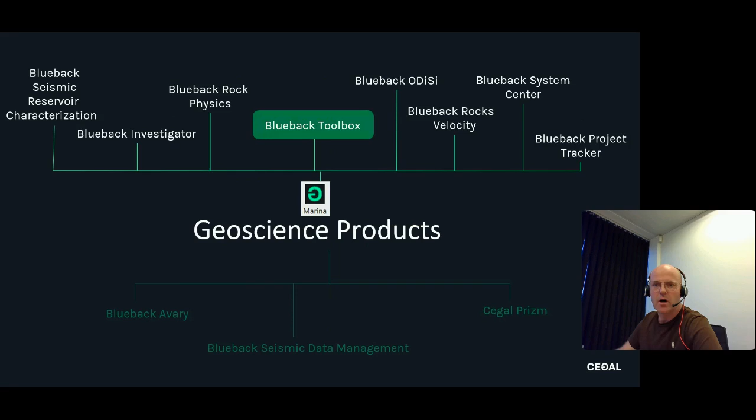Today, we are focusing on the Blueback Toolbox suite. The Blueback Toolbox suite is a comprehensive collection of tools designed to streamline and enhance your Petrel workflows, providing extended functionality and improved integration. This collection of small to medium-sized utility tools optimizes the user experience by minimizing mouse clicks, introducing features not available in native Petrel, and addressing common challenges geoscientists face in their daily Petrel workflows. Petrel is the best subsurface platform on the market today. The Blueback Toolbox suite expands Petrel and makes Petrel an even better software platform.

The Blueback Toolbox suite has been on the market for more than 10 years and is one of Cegal's most popular software products. The Toolbox suite has 5 individual toolboxes that are continuously being developed and expanded. In the latest release, we introduced 5 new tools and a range of enhancements to existing tools. All the tools have been requested by clients. Building functionality based on client needs is a common trademark of all our software products. The tools you get with the Toolbox suite are relatively simple in complexity, but they are highly appreciated by our clients.

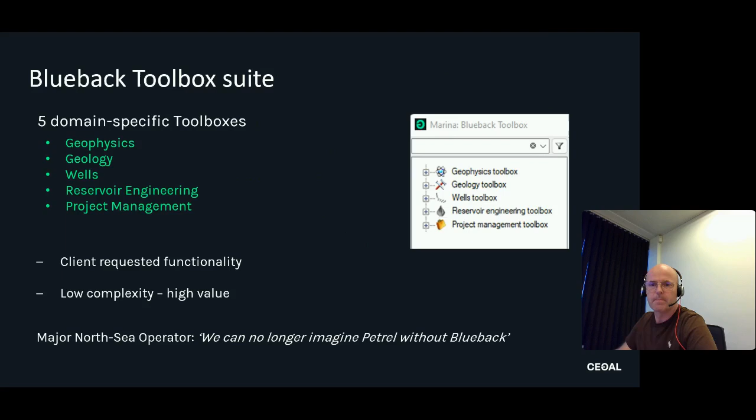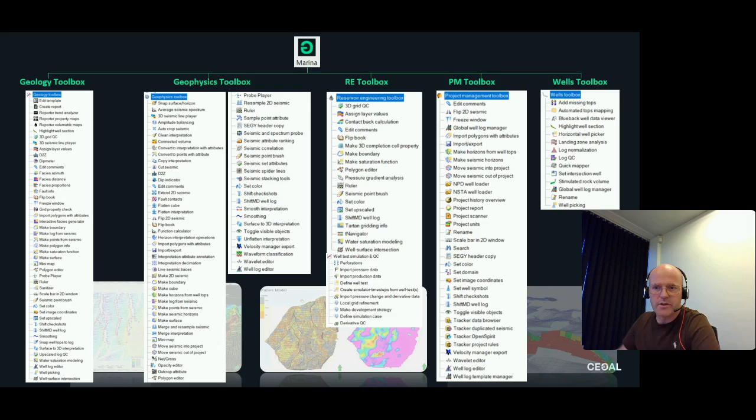Here you see a list of the 120 tools distributed in the 5 domain toolboxes: Geology, Geophysics, Reservoir Engineering, Project Management, and Wells Toolbox. Before we go to the live demo, let me summarize the 3 categories where Blueback Toolbox will streamline your Petrel experience. Blueback Toolbox introduces missing functionality that is not present in native Petrel. These tools let the user stay in Petrel for a variety of operations. Blueback Toolbox improves ergonomics on some standard operations that you otherwise avoid doing because they're very labor intensive. And Blueback Toolbox has tools that mitigate inconveniences that are a cause for general frustration.

In the demo, I will show examples from the 3 categories, and I will mix in tools from all 5 toolboxes. I picked out 13 examples out of the 120 tools that will give you a feel for how Toolbox is streamlining Petrel. So now let's jump to Petrel. I'll just turn off my camera here.

So before we start looking at the individual tools, let me just show you where we access the tools in the different plugins. So here you see the Marina dropdown that appears when you install plugins from Cegal. And we click here on the drop-down menu and we go and select Blueback Toolbox. And here in the Marina menu, you have access to all the 120.

But for the sake of the flow of this webinar, I've extracted the tools up to this personalized ribbons menu. Kudos to SLB for implementing that, so that we avoid clicking too much around in the menu. So I will show you, as I said, tools from the 3 different categories, and we'll start out with tools from the first category, introducing missing functionality. I have picked out 5 examples.

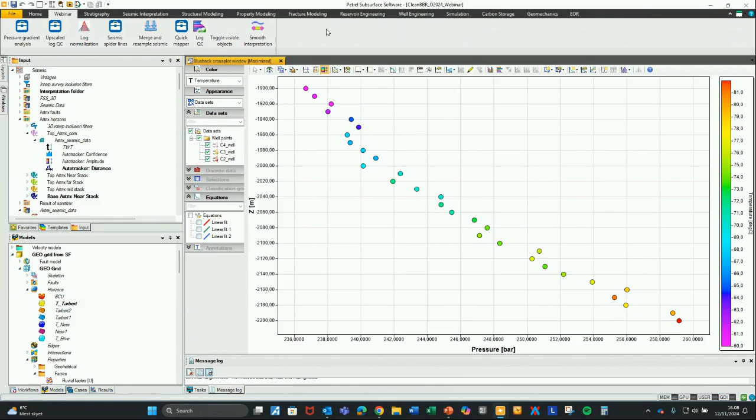So in this demo, I will introduce each tool by asking a question. So here comes the first question. Do you do pressure gradient analysis in Excel or other software and wish you could do it in Petrel? So with the pressure gradient analysis tool, now you can do that exercise inside Petrel. So here you see the menu. It's got lots of options. I'll just give you a quick overview.

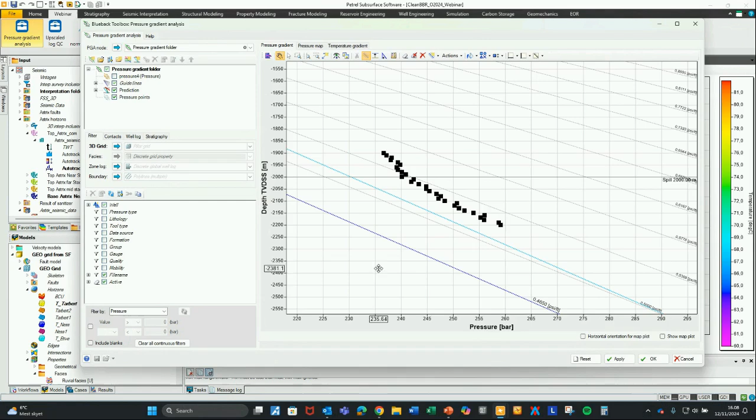So I've loaded my pressure points here already. We do that either by importing an ASCII file directly, or we can import those from point well data. So here you see the depth versus pressure plots with different gradient lines plotted on top. We can plot this in overpressure space, and here we can see that we probably have 3 gradients here. So this is just made up data, so of course we have 3 very well defined gradients here.

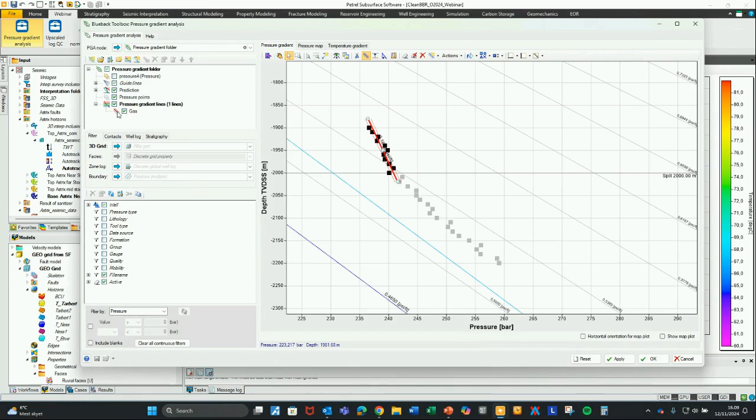So let's try and do the gradient regressions, and I'll do that by deactivating all the points and then setting the points for the individual gradient active. So now the first gradient here is active, and I can run that regression. That shows up here, and that shows up as a gas gradient. Those categories are defined by cutoffs on the gradients.

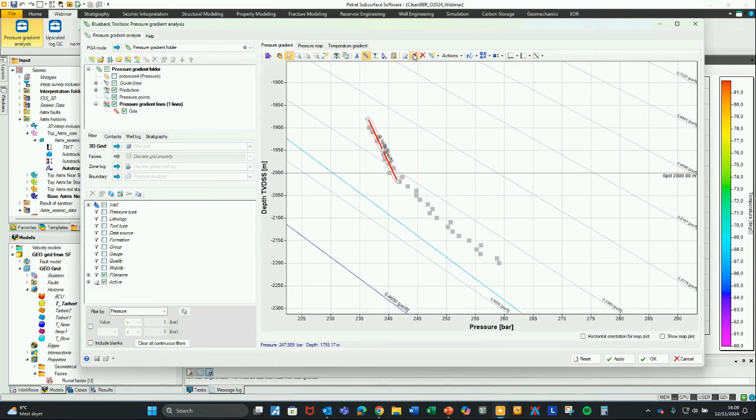Then I deactivate the points again and activate the points for the next gradient, run here, and you can manipulate these as you want. I just wanted to extend this line here a little bit like that. That shows up as an oil gradient, and then the last gradient here like that is a water gradient.

And now there's different exercises that we can do. We can, for example, run this scissor here that will then highlight the intersections between the gradients as the estimated contacts. So we have a depth estimate for the oil gas contact and for the oil water contact.

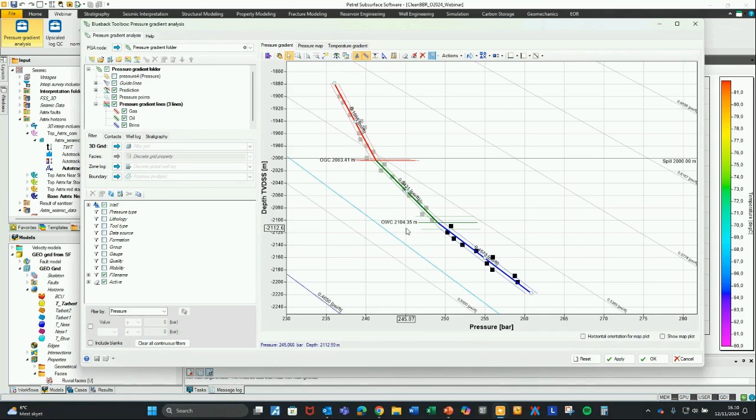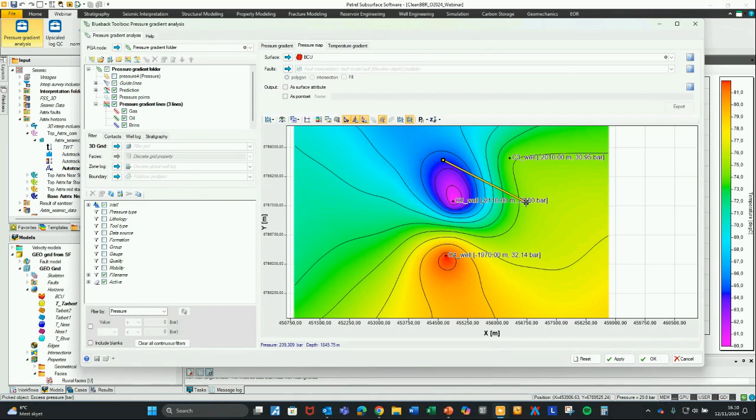We can also go to the next tab here, the pressure map, where we can insert a depth map. And here you see this is a structure map. When we press this button here, then that will be converted to an excess pressure map that will grid the immediate pressure points below this depth surface. And let's say that we had multiple gradients and multiple wells, we could then go in and do some fault segment analysis like this, and then do different fault segments, for example.

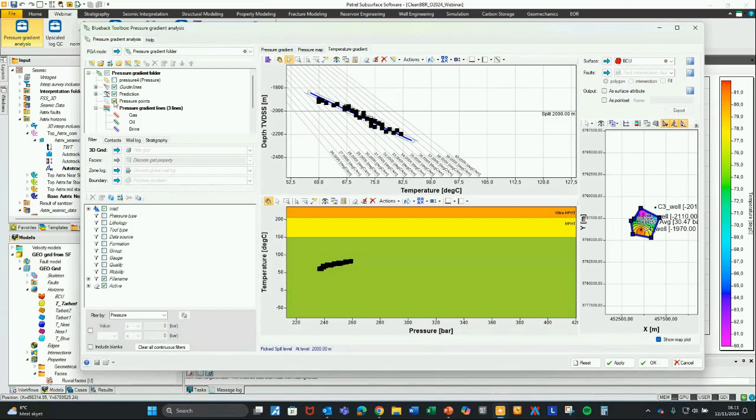Pressure and temperature are closely linked. So in this data set, we also have temperature information, so we can go in and run. So we'll just activate all the points and we can run a gradient as well. So here you see the gradient. There's lots of other details of this tool, but now I've given you a quick overview that tells you that you can do a detailed pressure gradient analysis inside of Petrel.

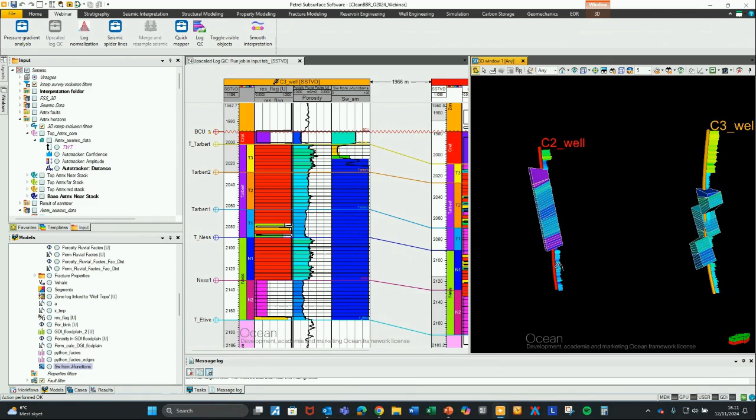Okay, so let me open the layout and ask the next question here. Have you ever been asked by a reservoir engineer to calculate vertical hydrocarbon columns in wells from the properties in a 3D simulation model? That's a very difficult task unless the cells in your 3D model are completely vertical and the well is just following that pillar of cells. So that is almost impossible.

But with the Upscaled log QC, we can go ahead and run that exercise. So as the name indicates, this is a tool that is built for upscaled log QC, and the tool does that by calculating vertical columns based on well log input and then based on grid input, and then it compares the two sets of columns. But it can also just be used to calculate vertical columns either from wells or from grid properties. So here we go in, select the wells that we want to do this calculation for.

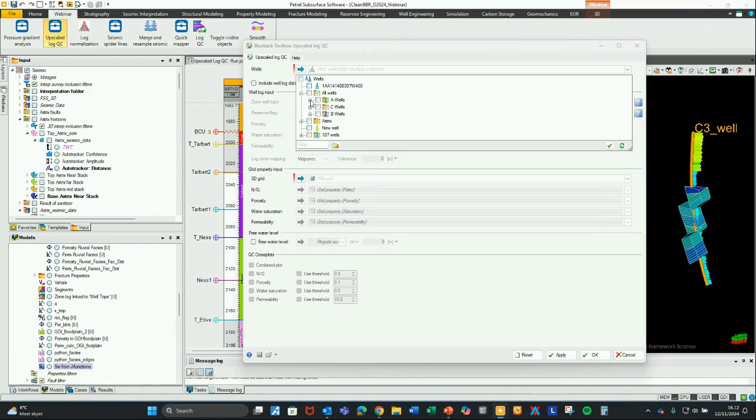So I'll just select these three first C wells, and then I need to specify the grid. This exercise will already pick out the relevant properties, so net to gross, porosity, saturation, and permeability. And then we can run this calculation.

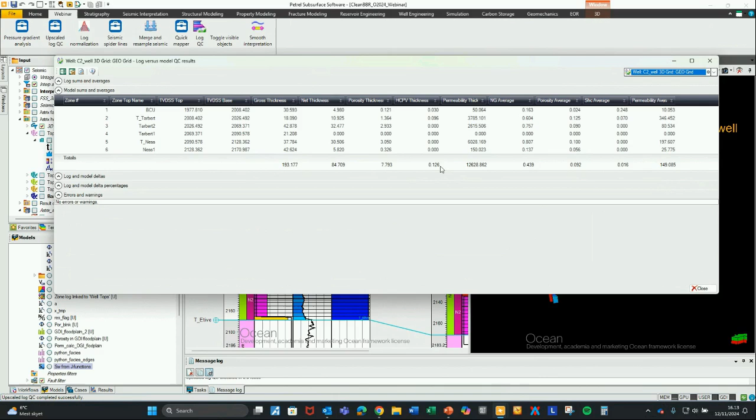So it's vertical columns, and it's done it per zone and in total. You can see here we have the different columns, and in this case we do not have a very thick hydrocarbon pore volume column. So that was the example that enables you to calculate vertical columns in Petrel based on wells and a 3D grid.

The next tool here, I'll just need to open a few objects from my well logs, the global well logs. I'll open up statistics for these two gamma ray logs.

So the question is, have you ever had the need for normalizing well logs per well in Petrel, for example between two different generations of gamma ray logs? That is a task that is very difficult because normalization of well logs has to be done per well. You can't just normalize an entire distribution, because then the normalization in the individual wells will be wrong. The log normalization tool in the toolbox allows you to do this per well.

So you can see in this example here, I've got two gamma ray logs, two generations. One here is present in 27 wells with a range from a minimum of 23 to a max of 164. The other generation is recorded in 80 wells with a minimum of 48 and a max of 188. So the same kind of delta, but different min and max.

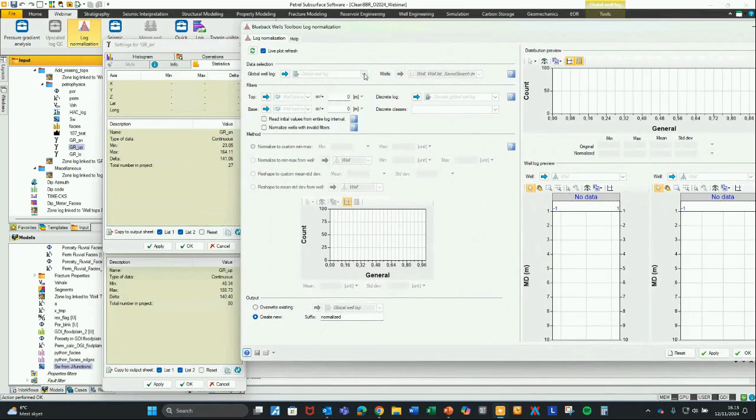And as a geologist, I know that these wells have been drilled in the exact same geology, so the range here should be more or less the same. For me to use this entire group of gamma ray logs, I need to go in and normalize one group to the other. So I'll go to log normalization, and I'll do the normalization of these 27 wells to the numbers in the other gamma ray log.

So I'll pick gamma ray AN. I'll select all the wells where this log is present. The tool is then extracting some statistics from the original distribution. Then we've got different options to do the normalization, and we'll just normalize to this custom minimum and max.

So here we'll go and select the minimum 48 and the max 188, and then we can observe the statistics of the normalized distribution. Down in this area here, we can go in and make snapshots in the individual wells to see the blue is the original and the orange here is the normalized log.

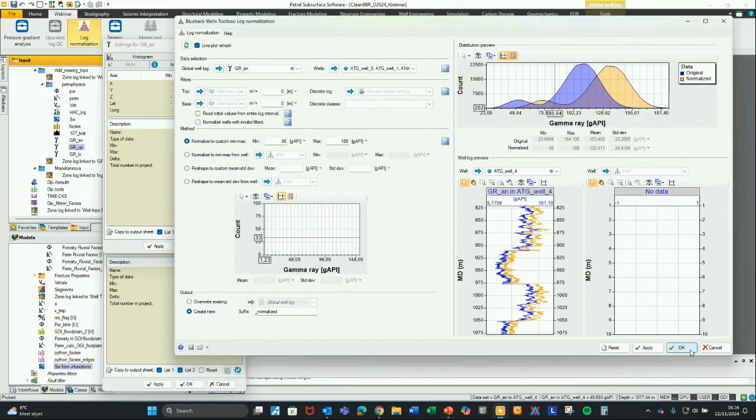We can then choose to overwrite the existing log, or create a new one, and in this example we'll just create a new one. Let me dig that up here at the bottom of my global well logs and have a look at the statistics. So that's the 27 wells, and we can now see that the minimum is 48 and the max is 188, and it's done that normalization in the individual wells, reading off the initial min and max for the normalization per well.

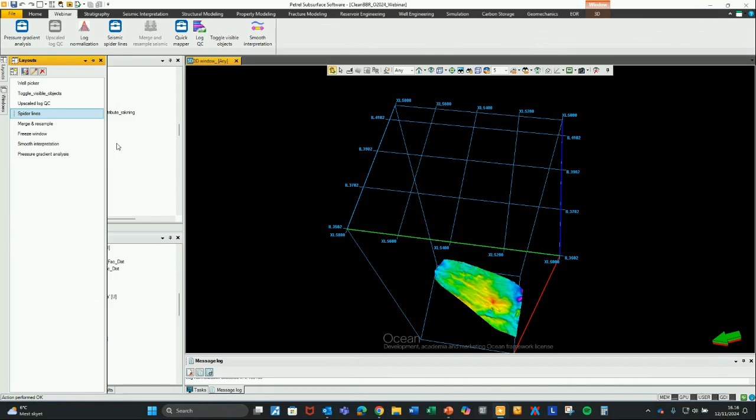All right, so getting ready for the next tool. Let me open up my layout here. And the question is, do you miss old Geoframe functionality in Petrel? For example, the spider lines tool.

We've gotten this question from many of our clients: could you please build in this tool, or this tool from Geoframe or other older packages? So we recently built in the spider line tool that allows us to build a spider web-like distribution of 2D lines from a 3D cube.

So let me open up the tool. Here I will select my 3D cube, the one that we're looking at here.

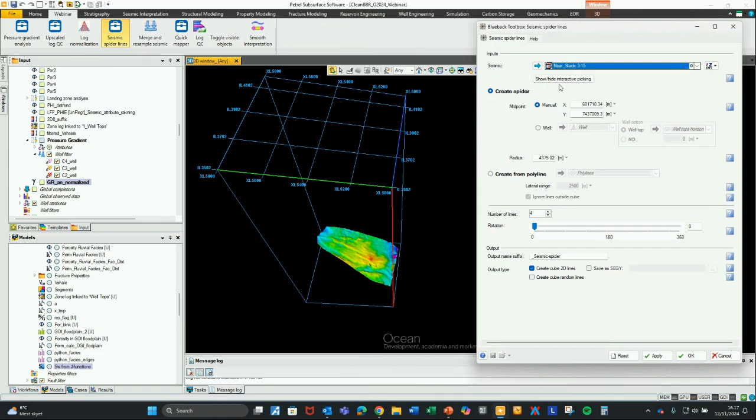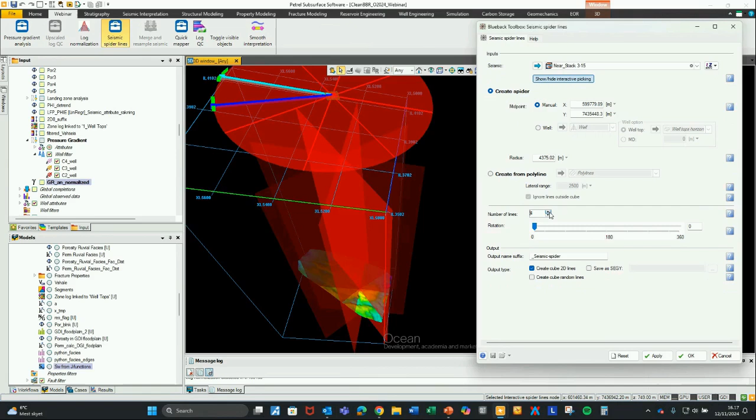And then I will generate, I'll go in and generate this widget. We want the center of this spider line to sit at the top of this structural surface down here. So I'll just activate this and drag it in here.

There we go. And then I will set the number of spider lines to 6. Here I can drag the radius of the length of these 2D lines, and I can also manipulate the angle, though it probably doesn't make a big difference. I can choose to generate these as 2D lines or as random lines in the 3D cube, so I'll just do the 2D seismic lines.

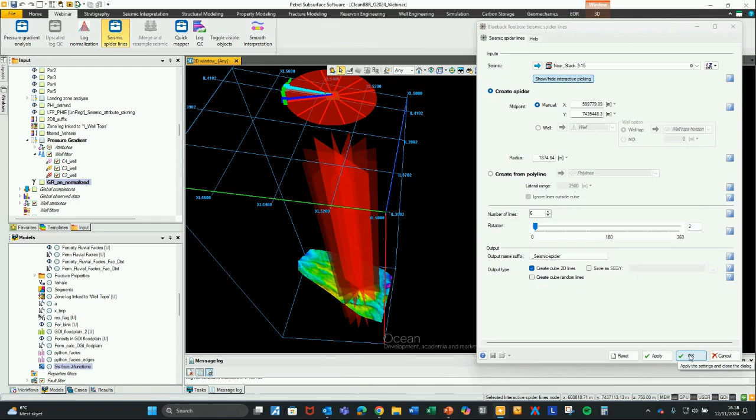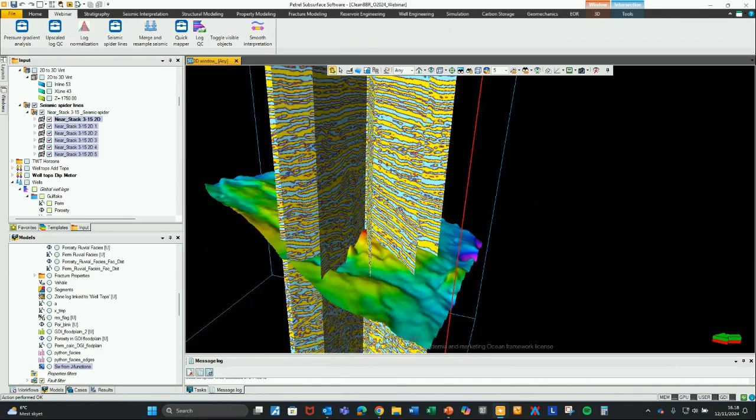I should have scrolled up to the bottom of my seismic folder, but now you can see I've just generated these 6 2D seismic lines that go through this top structure. I need to go rescan these amplitudes for the color scale to adjust, but here you can see that we've implemented it. That's a good example of us building in good functionality from some legacy products out there.

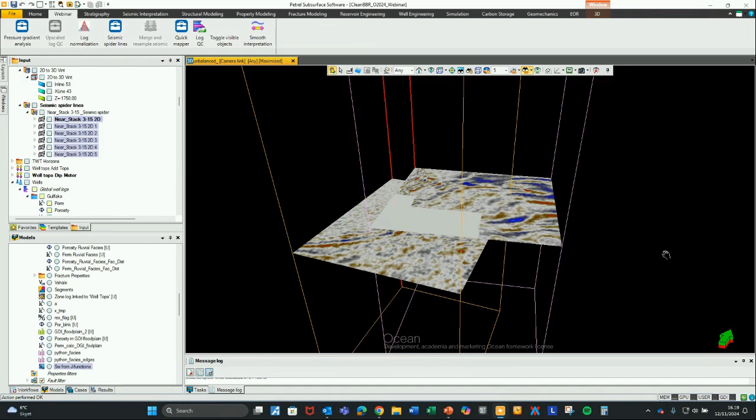The last example in this category, let me bring up my layout. So the question is, when you have adjacent or overlapping seismic cubes, do you go to other software platforms to merge these seismic cubes into one big merged cube? With the toolbox, you can do that exercise in Petrel. In this example, we have 2 overlapping seismic cubes, one here and one here, and the first one has an area of dead traces.

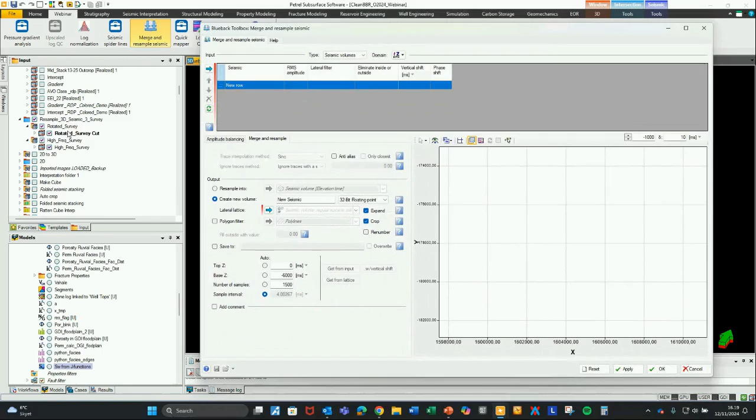Let's open up the merge and resample tool that allows us to do this exercise. It's already picked a tool, but I'll do it from scratch. Here we take those seismic cubes and drop them into the menu. You can already see the extent of the first cube, and then we drop in the next one, you see the extent of that. These colors indicate which of the cubes takes priority.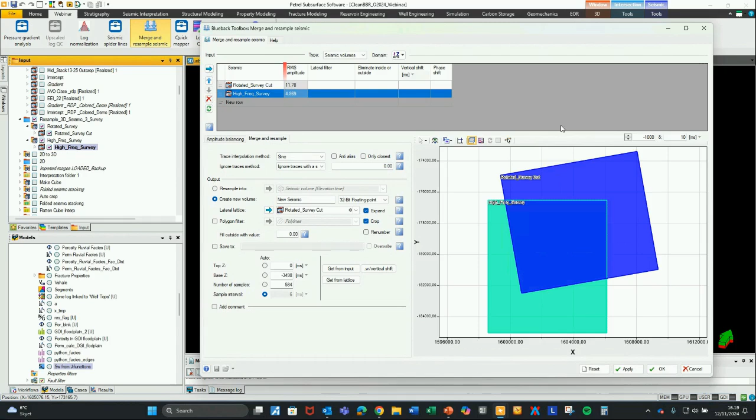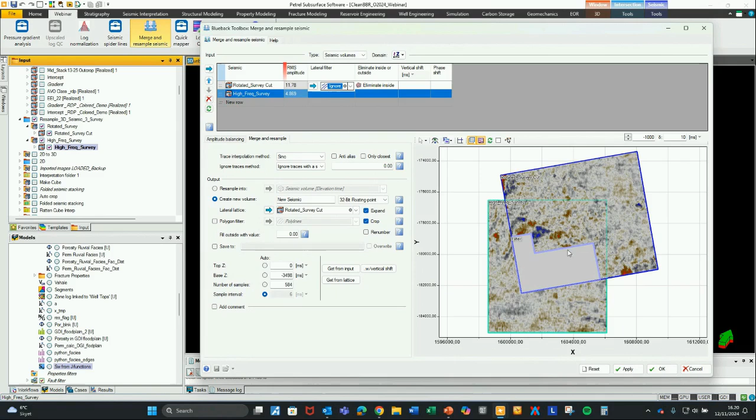So if you want to change that, you can push these cubes up and down in this menu. You can also display them as time slices. In this example, we want this blue cube to take precedence over the green one, but we have dead traces in the blue cube. So we can specify a polygon for that particular cube with the dead traces. I've digitized this polygon already, and we can tell the tool not to use the traces for the first input, but go to the second input and use those traces.

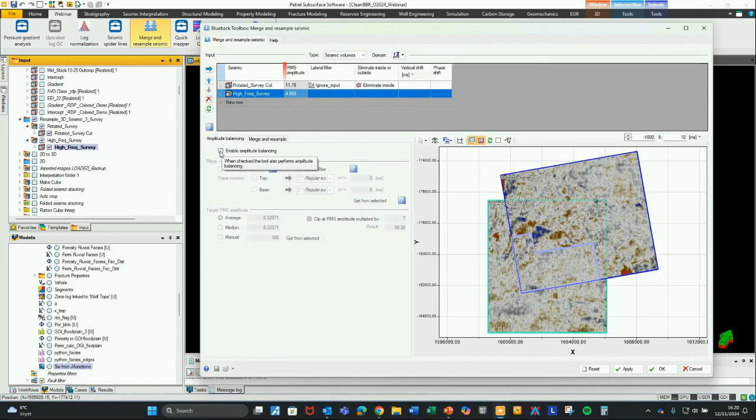Then it's always a good idea to do amplitude balancing in order to avoid areas of very bright seismic and areas of very dim seismic. You can see the tool has already calculated the root mean square amplitude for each of the cubes. When we enable this amplitude balancing, the tool calculates an average between the two, the root mean square average. You can also do median or just an arbitrary number.

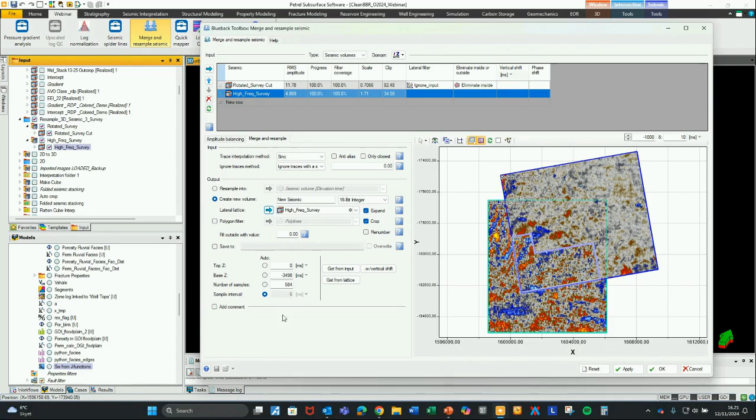And then the tool calculates scalars that are applied to the individual cubes to bring them to this new common average. Then we go back, specify the output format, and then we need to specify the inline crossline geometry of the output cube. Here we would like to use the inline crossline of that secondary cube, the green cube, which is this one. So I'll drop that in. Remember to keep the expand so that it expands to include everything here. We specify the depth interval and the sample interval, then click OK, and the tool runs this merge operation.

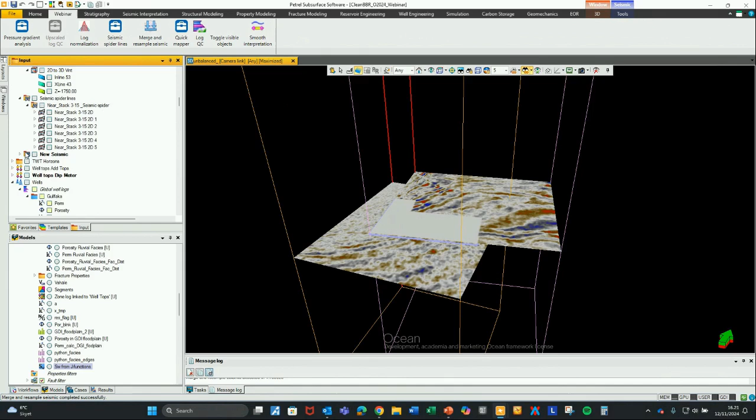Of course, this is demo data. If you have big mega cubes, it will take a little while—sometimes a day if you have really big cubes, but it will chew through the numbers. So let's see, it was here, new seismic. So now we have generated this new merged cube, merged from these two input cubes. That was the last tool in the first category.

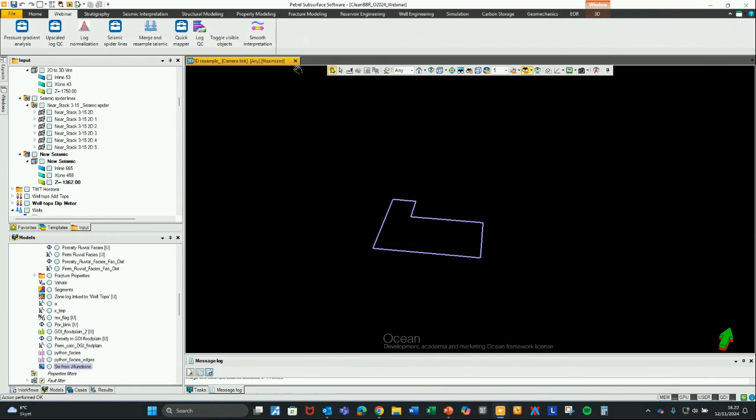Moving over to the next example. Now I will show you tools from the second category, tools that will improve your ergonomics, meaning less mouse clicks and less keyboard interaction to run certain operations.

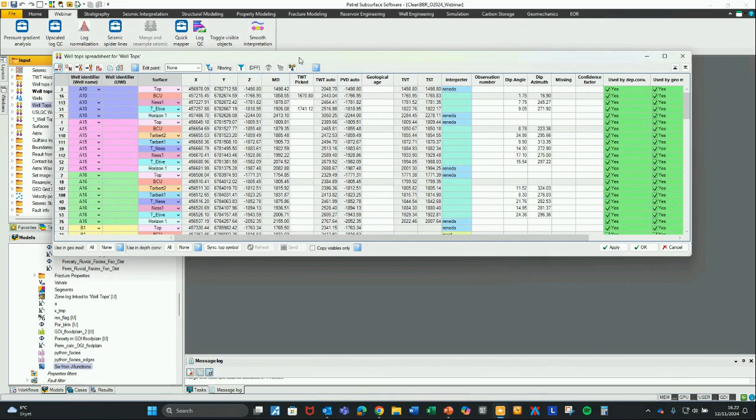The first example here is, let me bring up the information that enables me to ask the question: do you find it tedious to sample log attributes per zone, per well in standard Petrel? That was the wrong spreadsheet, let me bring up the zone spread here. So what I'm talking about is generating attributes like mean porosity per zone per well, the minimum porosity value, the maximum porosity values, and facies fractions. This is an extremely tedious exercise in Petrel, and with the tool called Quick Mapper, that exercise becomes relatively easy, reducing your mouse clicking quite significantly.

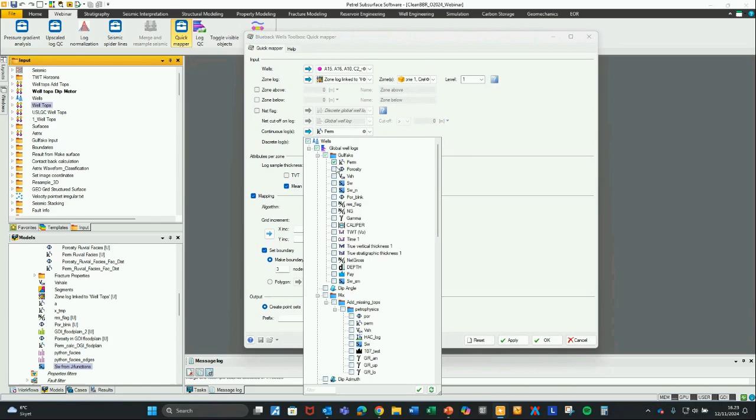Here we can go in and select multiple continuous logs: permeability, porosity, V-shale, and saturation, for example. We can also at the same time calculate facies fractions per facies log. We'll just add 2 facies logs here.

Then we select the attribute. We'd like to know the thickness, the mean value of those continuous logs, minimum, maximum, peak, rolling average, and curve summation. And then immediately we can go ahead and populate those attributes out into 2D grids.

Here I'll just specify the gridding settings, and I will click OK. And then down here, you can now see that the tool is calculating these attributes per zone and gridding out those attributes.

So the result sits down here at the bottom of the input, and you can see that we have two data objects per zone. For example, the point sets, this is the individual numbers. You can see at this point set for one of the zones, we have all the different attributes that we just calculated with very few mouse clicks.

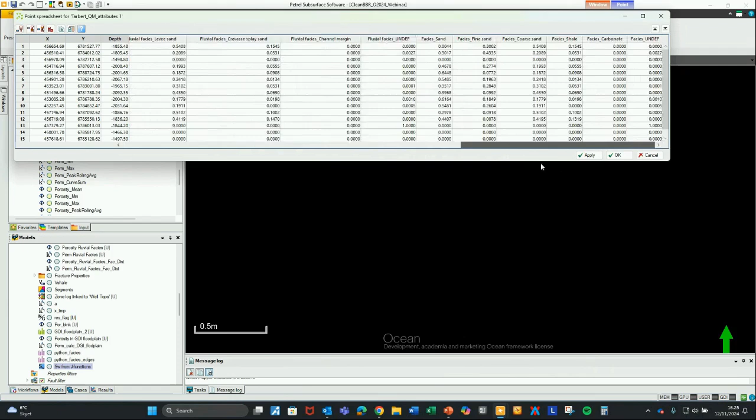Just to show you how many numbers we're talking about per zone, I can show you this spreadsheet here. We got the permeability attributes, porosity, V-shale, water saturation, and then the different facies fraction per facies type in those well logs. And immediately we populated those attributes out into 2D grids.

So here we look at the different permeability statistics, porosity statistics. This is a brilliant tool to go in and identify trends, lateral trends in your data, and you also have the different facies fractions here.

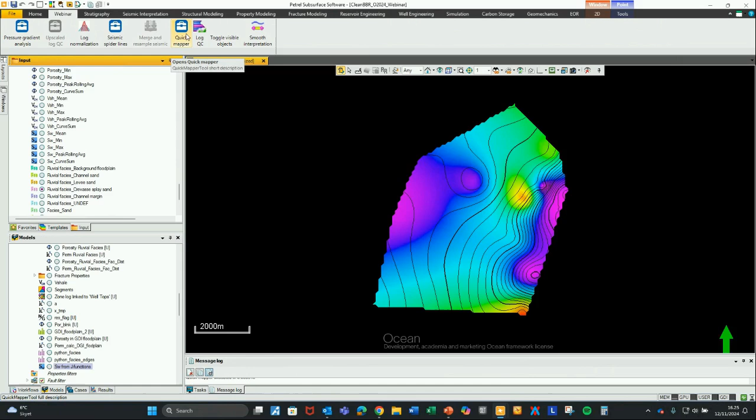So that was the first tool for improving ergonomics. The next one is a relatively simple tool.

So the question is, as a geologist, geophysicist, or reservoir engineer, we insert pseudo wells all the time. Do you find that exercise of generating pseudo wells a little tedious? Then we have a good solution for you.

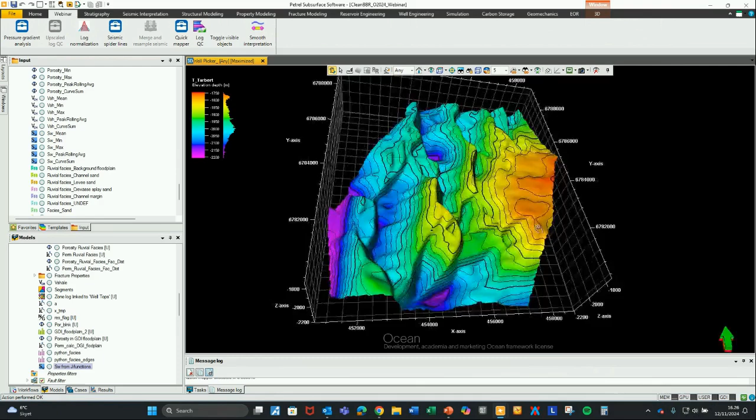So here I can zoom in on this structure here. I'd like to insert some pseudo wells. I can go here to the tool called well picker, vertical well picker, and I can insert wells with one click. You can see here I'm just very easily inserting some vertical wells along this top structure.

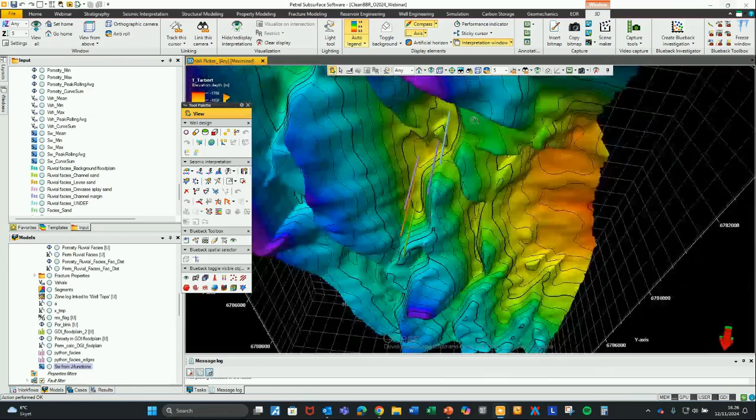You can see it extends a certain length above and below the surface that I click on. Of course, those lengths can be adjusted in the settings of this tool.

We also have a horizontal well picker. Let me just, that sits right here. That horizontal well picker requires that we go in and specify some geometry: the length of the horizontal part of the well, the azimuth of the horizontal part of the well, and then a vertical offset we can apply to the clicking.

So if I go in here and click here, now I am very easily inserting vertical or horizontal wells. And this is completely horizontal wells. You can kind of bend the horizontal part up or downwards by playing a little bit with the toe inclination.

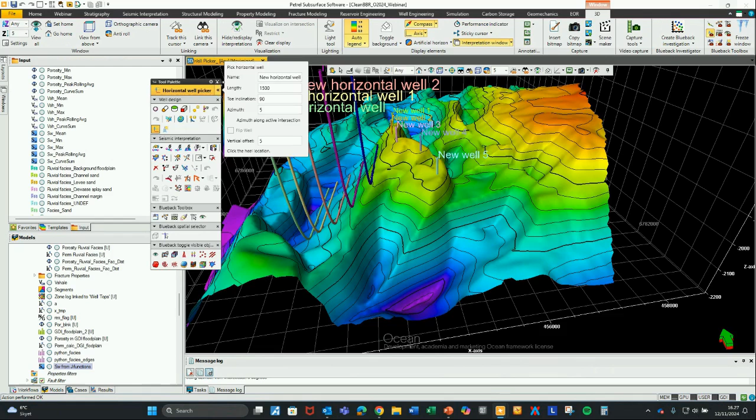The vertical well picker is workflow enabled. So let's say that I want to go in and build a regular spaced grid of vertical wells. I can then go to the workflow here.

Let me just show you, the workflow step looks like this. So here we have the well picking. And if I run that workflow here, you will see that now this workflow is inserting this regular spaced grid of vertical wells.

We are currently working on workflow enabling the horizontal wells. You'll probably see that being introduced sometime next year.

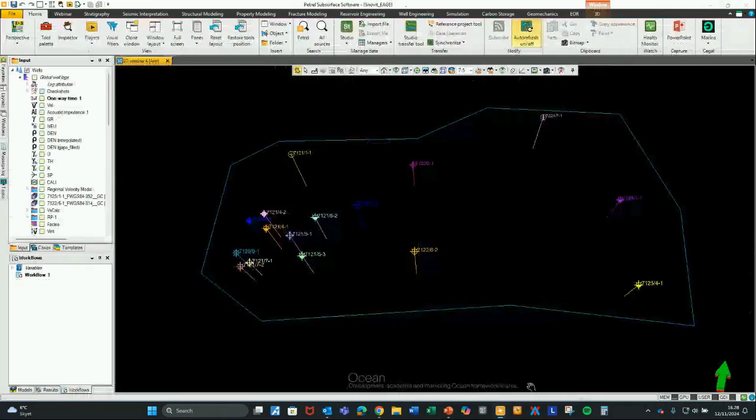All right, so the next question requires a different Petrel project. The question is, when you have the need to copy check shots between wells in Petrel to control your velocity field, do you find it tedious with the export-import workflow of check shots? So with the toolbox, we have a tool that allows you to do that copy of check shots between wells very easily.

So in this project here, we have a field where we have time depth relationships defined for most of the wells, but we do have two wells here out on the flanks where we'd like to insert and generate a time depth relationship kind of to control the velocity fields to make sure that the velocities don't go crazy out in these areas. And to do that, we would like to copy.

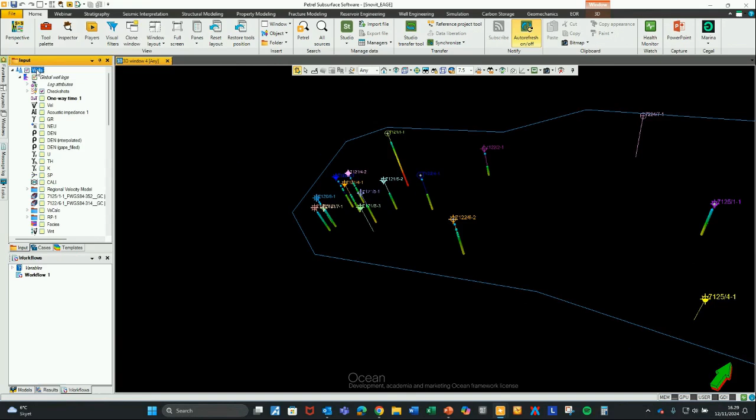So you can see we've got check shots in this well. We'd like to copy these check shots into these two wells. And doing that without the toolbox is a little bit tedious export import exercise. With the Blueback well data viewer, you can do that exercise in Petrel. So this is the Blueback well data viewer. You got all the wells in the project.

We've compiled the different data types, well data types into tabs, and we can go immediately to the time depth relationship tab. And here we can, for example, highlight wells with check shots. That highlights all the wells that has check shots. So you can see, as we see over here, well 1-1 has check shots, but for example, 4-1 does not have any information and 7-1 does not have any information.

So if we go to well 1-1 and we click this drop down, we can go in and look at the details of this check shots with the spreadsheet and the different velocities. And now we'd like to copy this check shot set to well 4-1 and 7-1 like this. We've chosen the check shot, and then we hit this button here. We'll then simply copy this check shot set to these wells.

So now if I go to well 4-1, it does not have a defined TDR yet, but it now has a check shot set. So here we've conveniently given it copy from well, and we can choose that, and then we can hit this button, and now we can generate the TDR information from this check shot. And let's do the same thing for well

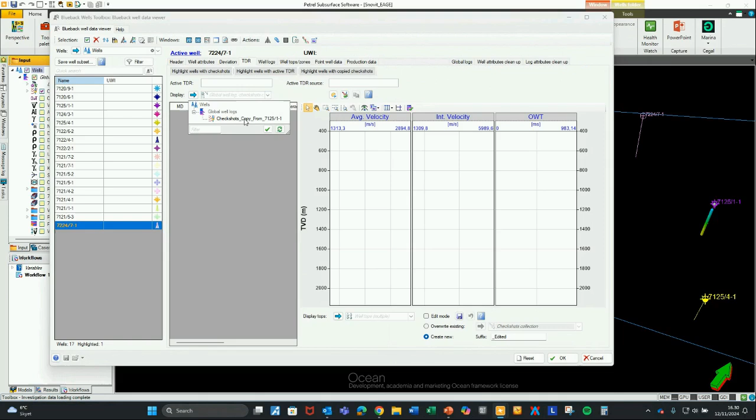7-1. Generate the TDR, and then close this menu, and then we can go here, toggle the one-way time, and now you can see that we have TDRs, fake TDRs defined in those two wells so that we can go in and control the velocity field. Back to the other project and open up my layout.

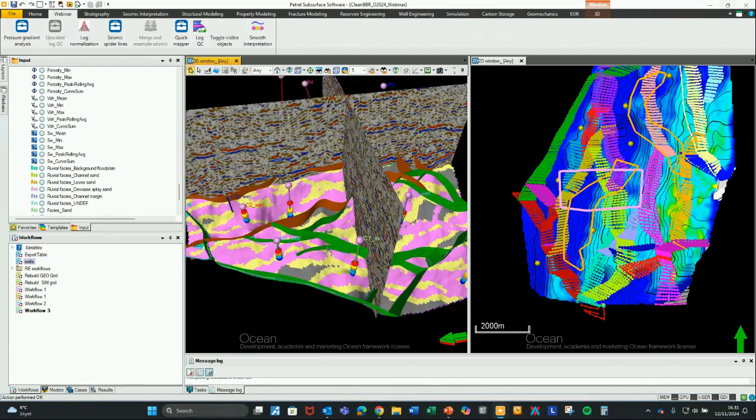So very often in our Petrel windows, 2D and 3D windows, we display a ton of information, and sometimes we like to maintain some data types, but quickly untoggle some other data types. And then the question is, when you want to toggle or untoggle specific data types in Petrel windows, do you find it a little stressful navigating the different data tabs and scrolling up and down to access those toggle boxes that enable those quick untoggles or toggles of different data types?

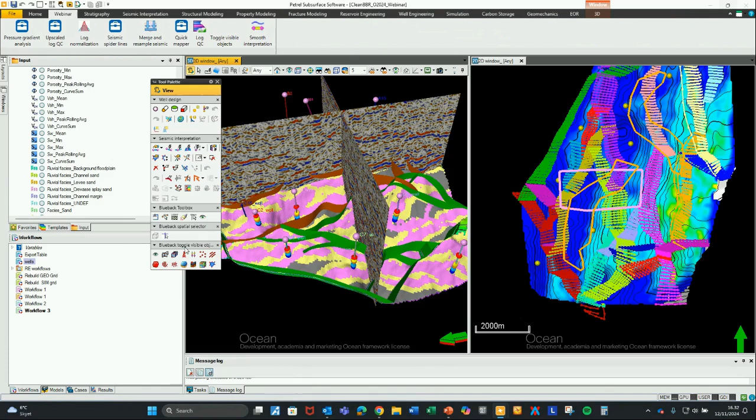So we have a little tool that is very helpful for this exercise. It's called Toggle Visible Objects. It was introduced here in the latest release of the toolbox. So let's see how it works. It sits here in the tool palette, toggle visible objects. So in this example here, we have many different data types.

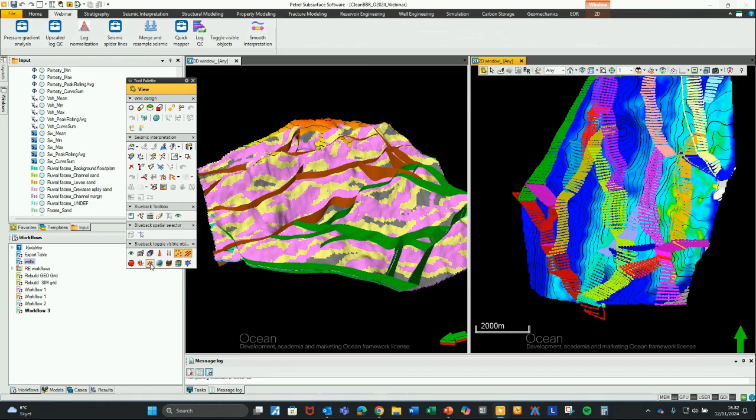So in this case here, we just want to look at the model data, so we can very quickly turn off the seismic and the well data, so the well trajectories and the well tops. We can go to this 2D window, for example, untoggle the points and the polygons and the fault interpretations. Then we can go back to the 3D window, and you can see that the tool remembers what we toggled

or untoggled in this, so we can very easily go and toggle those data types back on, and for example, untoggle all the model data in this case. And the same goes when you go back to this window, it remembers what we toggled and untoggled. So that's a very nice feature. Simple, typical toolbox tool. So that was the last example in the second category.

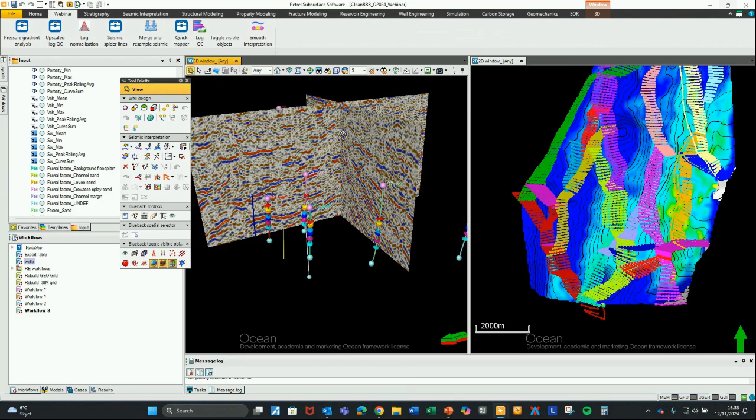Now we're moving on to the third category, where I will show you tools that mitigate general inconveniences. And here again, I've got 4 examples. So again, this is a well log statistics example. So again, I go back to the gamma ray, but now I'm going to open this third gamma ray log. And here we observe some crazy values.

So the question here is, when you observe erroneous log distributions in global well log statistics, do you find it hard to identify which wells are causing or have those erroneous logs? So we see we have a gamma ray log, and we have a minimum value of -76 and a maximum value of 888. And we know that this is not correct. So something is wrong in some of the wells, but how do we identify the wells that have this issue?

So we can use the log QC tool from the toolbox. Here we'll go in and select the gamma ray log. So that's this log here. It immediately tells us what template and what units to expect. We select all the wells where this log is present.

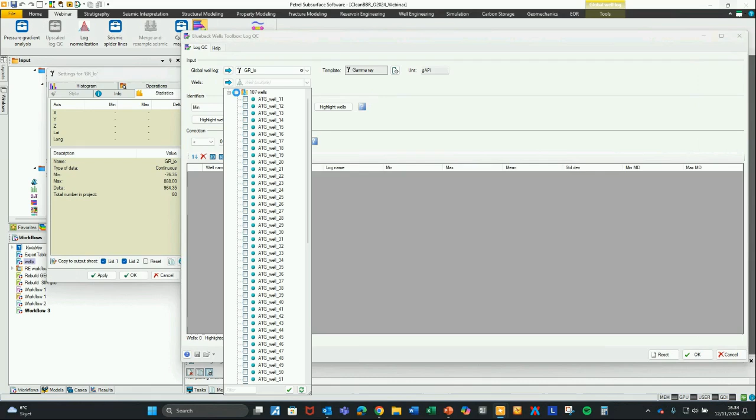And the tool here is extracting statistics from each log per well. So you can see here we've got for this well 11, the minimum, the maximum, the mean value, standard deviation, minimum measured depth, and maximum measured depth. And we see that we have some very erroneous values over here.

So let's try to identify the wells that have those low values. So you can see here we can run some identifiers based on some cutoffs of the statistical extractions. So in this case here, we can tell the tool to show me all the wells that have a minimum value less than 10. Highlight the wells. 3 wells have been highlighted. We'll bring those to the top of the list.

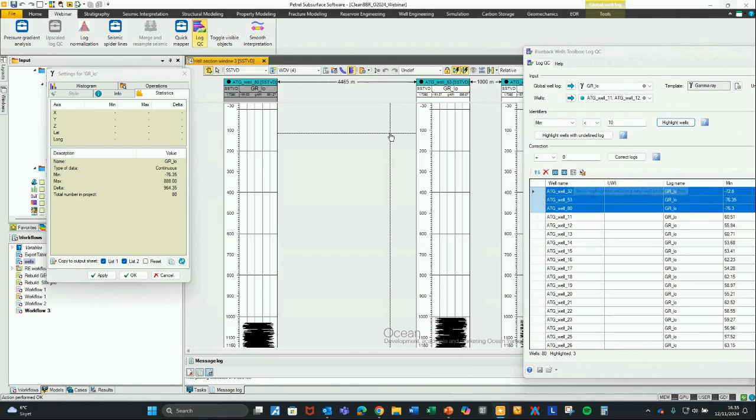And here you see, yes, all right, that looks like the wells with those erroneous minimum values, and they also have some crazy maximum values. So let's try to place those 3 wells and 3 logs into a well section window, so we can see what's going on. And in this case here, we can immediately see something went crazy wrong with the recording, so the gamma ray logging tool was probably burnt. So we can't do anything to rescue these logs.

So let's go ahead and make sure that they don't mess up the work that we have to do based on this log. So we'll just simply go ahead and delete them. We update the statistics over here. Now we've taken care of the crazy low values. Now we'll need to look at what wells are causing those high values.

So in this case here, we'll then change it to show me all the wells that have a maximum value higher than 200. Highlight the wells. That is 2 wells. Again, we'll bring those 2 wells to the top of the list and post those directly into a well section window.

And in this example here, we can see that these are probably some crazy spikes going on, which is not unusual, but it looks like we can actually use the rest of the logs. So we'll go in and use the native Petrel despiking tool to despike these, and then we can still use those gamma ray logs in the workflows.

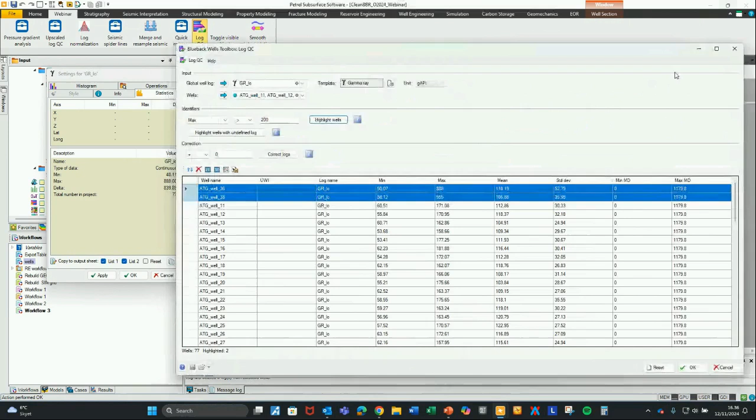All right, so getting ready for the next question. No, sorry about that. Getting ready for the next question.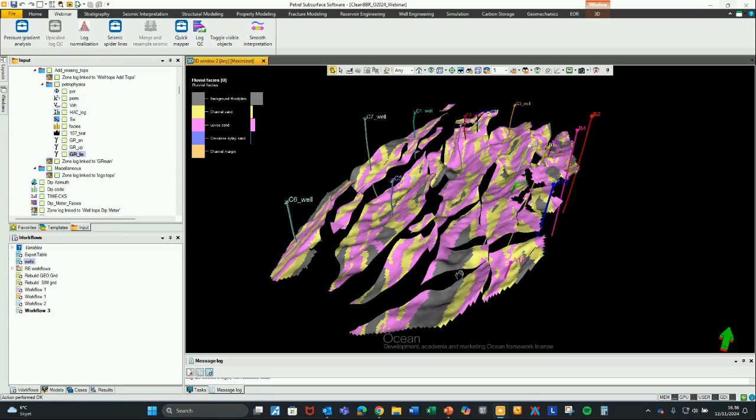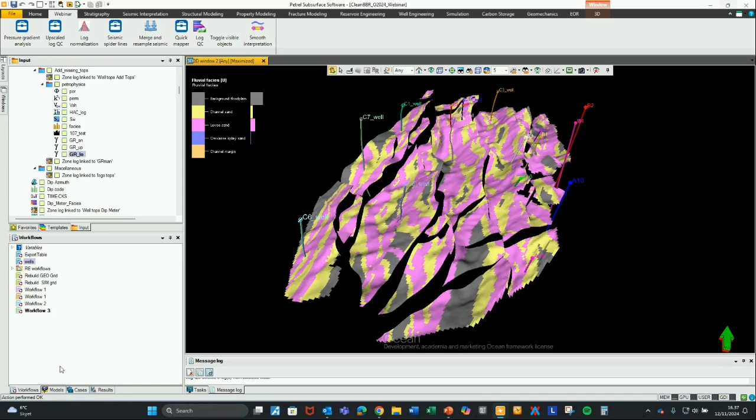So the question is, when you have finalized your technical work and you're ready to grab screenshots for PowerPoints and reports, do you find that zoom and spin functionality quite annoying? I do. So this is the example that I've prepared. I have finalized my geomodeling exercise and I'm ready to take some snapshots for a PowerPoint for a peer review. And I want to start out with the facies model.

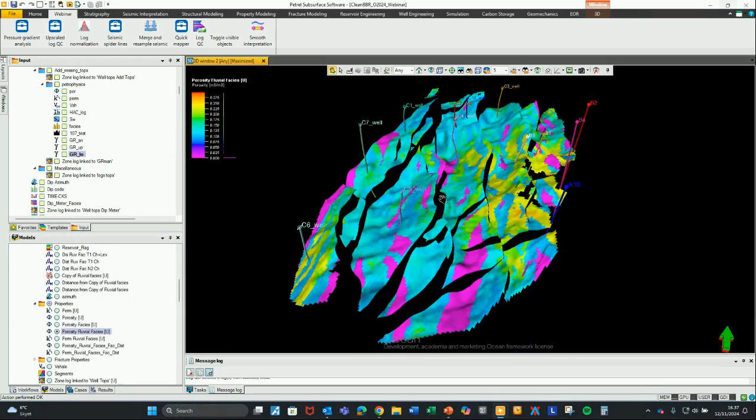So I angle my 3D window exactly how I like it. I copy the bitmap and paste it into my PowerPoint. And then I'm ready to do, for example, the porosity like this, and then I accidentally do this. Oh shoot! And then I need to go back, take new shots of my facies and so on and so forth.

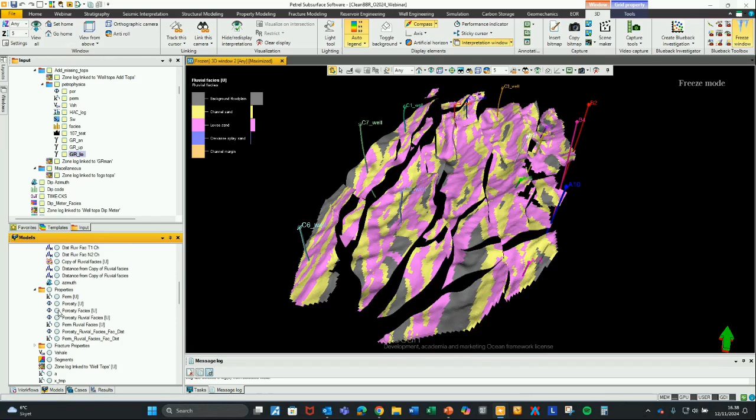So to avoid that, we have a very simple and smart tool. So if I go here to the Windows tab, there's this freeze window that freezes the window. I cannot rotate, I cannot zoom, but I can still take my snapshot and I can still change the data and then go to my porosity, take my next snapshot, paste, and take the next, the permeability, for example. So that's a very neat little feature.

Again, the next tool will just stay in this window. So the question is, do you sometimes miss a scale bar in the 3D window? And here I'm showing again a relatively simple feature, both for reporting snapshots, but also just for your personal dimension reference. It's very nice to have a scale bar in a 3D window. So we've got this tool called the 3D ruler.

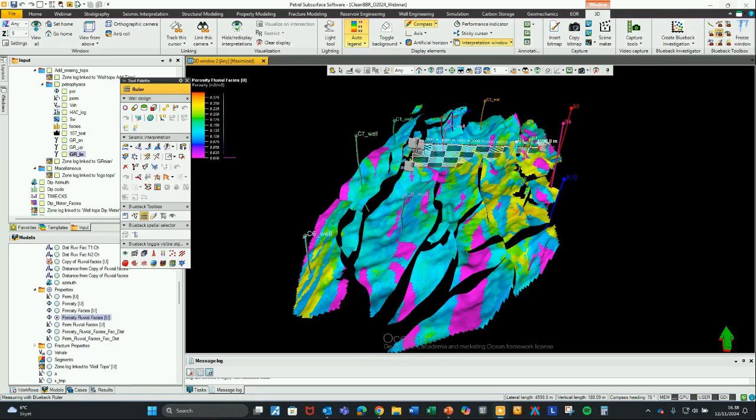So I can insert a ruler here at the back end of the facies model here, or the porosity model, and that gives me some dimensions. So laterally we've got about 5 kilometers, and depth-wise this is expanding to about 200 meters, and we can insert multiple of these 3D rulers.

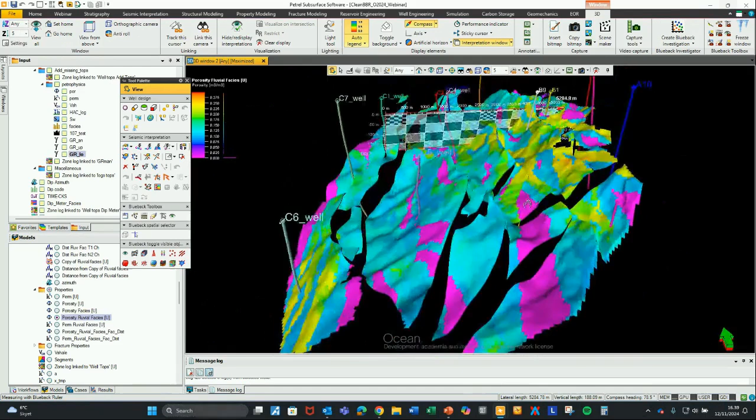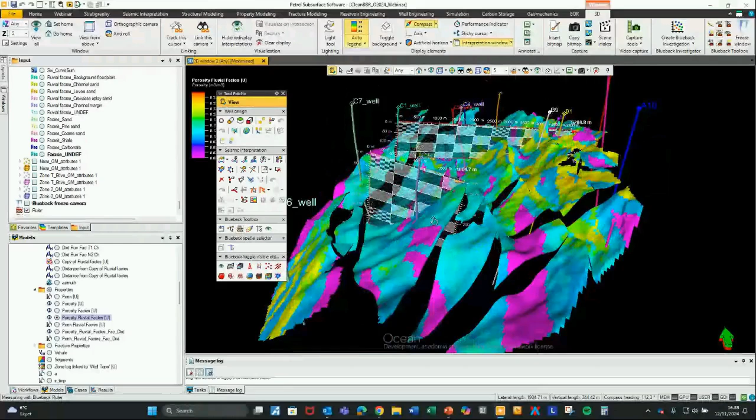So if I want to know a little bit about the geometry from this... I don't know what happened here. Let's just get rid of that one. I want to know something about the dimensions from this low to this high. I can drag, insert one of those, and that tells me that the difference between this fault and this fault is a little less than 2 kilometers, and the depth difference is about 350 meters in this case.

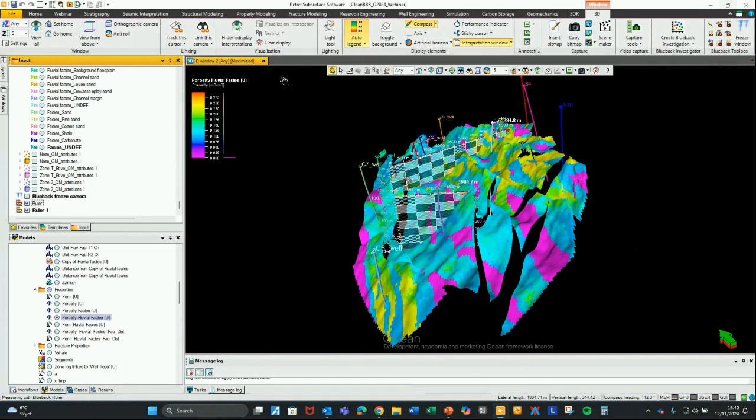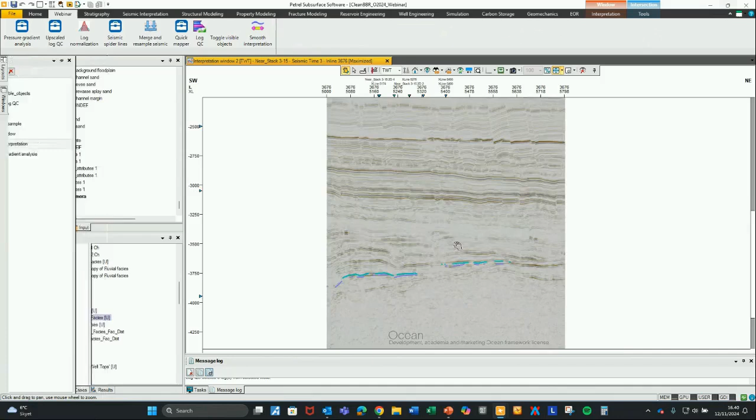And as you saw already, these 3D rulers live as objects here in the 3D windows. We can toggle them on and off, and we can share them between different 3D windows. So that takes me to the last example today, and I will open up my layout. So this is an example of a tool that helps seismic interpretation.

So the question is, do you find it inconvenient to adjust and fine-tune tracking parameters when you want to interpret weak reflectors? To illustrate what I'm talking about, let's start interpretation of a weak reflector. So I've inserted a new horizon. Then I go to seismic interpretation and activate the 2D tracking tool in Petrel. In the example, we want to track this blue reflector here.

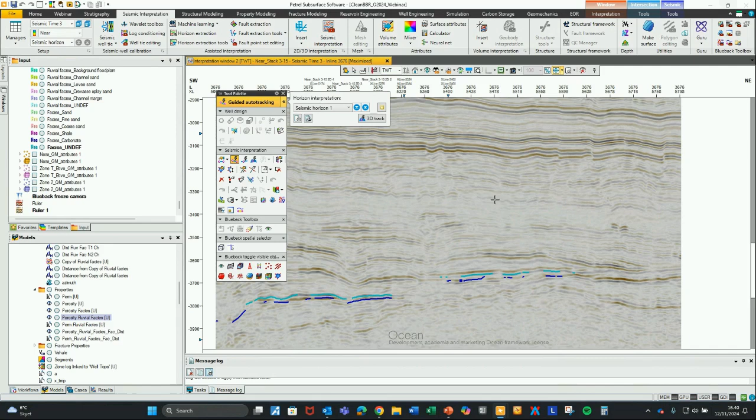I'm using the 2D Petrel tracking tool like that, and you can see it's doing a pretty poor job of tracking this. It's weak, but it's still present. So for me to do a better job on that with the native Petrel tool, I need to go in and adjust the tracking parameters on this horizon. Or with the toolbox, I can simply activate what we call smooth interpretation.

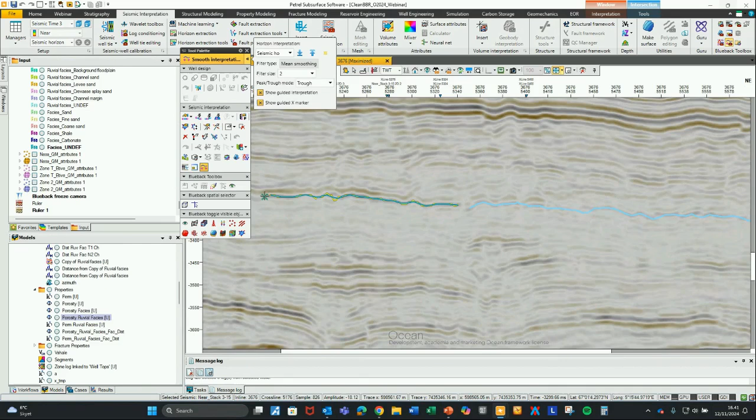And then you can see what I'm doing here allows me to track this blue weak reflector relatively easily, and it's doing a pretty good job. So here, something like this. And if we zoom in, you can see why it's called smooth interpretation. The yellow line here is the actual amplitude tracking, and the blue line is the resulting smoothed version of that tracking.

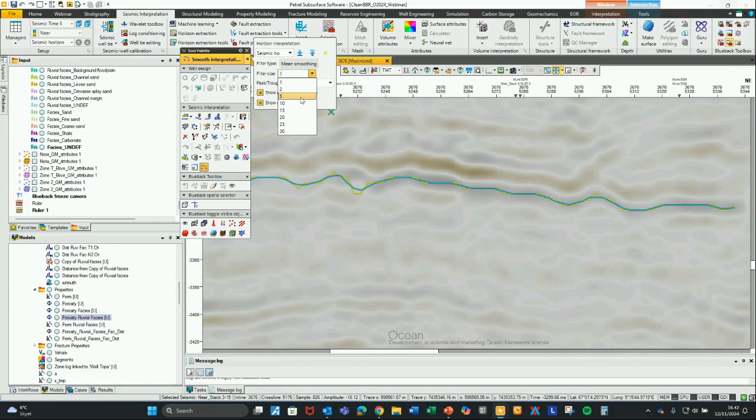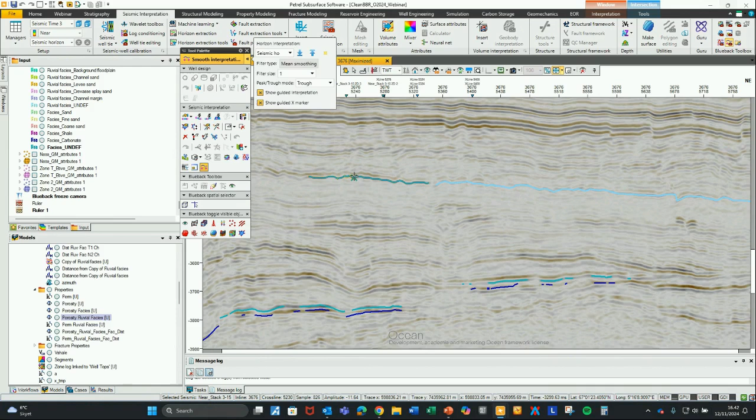And we can go in and play with the smoothing. We can do a little bit of adjusting of the smoothing parameters like this. But then you can see again, a nice tool that makes it a lot easier to interpret these weak reflectors. So that was the final example in the live demo. So let me jump back to the PowerPoint here and summarize what we've just seen, and I will turn on my camera again.

So in this webinar and this live demo, we've seen examples of how Blueback Toolbox is making your Petrel workflows more efficient by introducing missing tools that are not present in native Petrel, by improving ergonomics on standard workflows that otherwise are very labor intensive, and by introducing tools that mitigate general inconveniences.